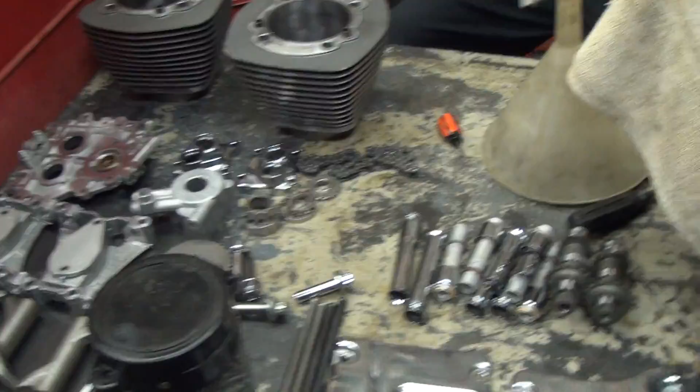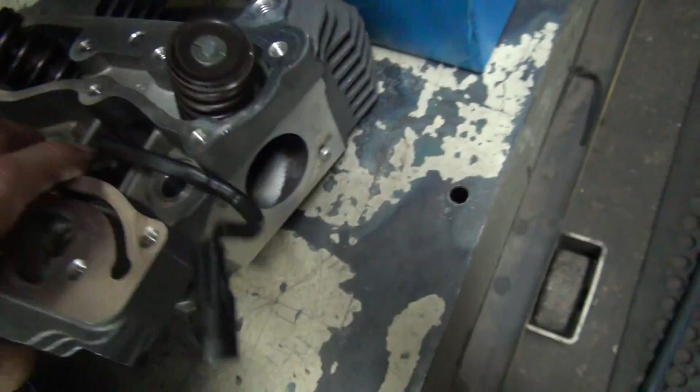Okay, there's our junk pile. New parts over in the middle pot. So these are the heads. Don't see any damage on anything. Nice and clean. Lifters we're going to replace. Cams we're going to shit can. Push rods go with the cams.

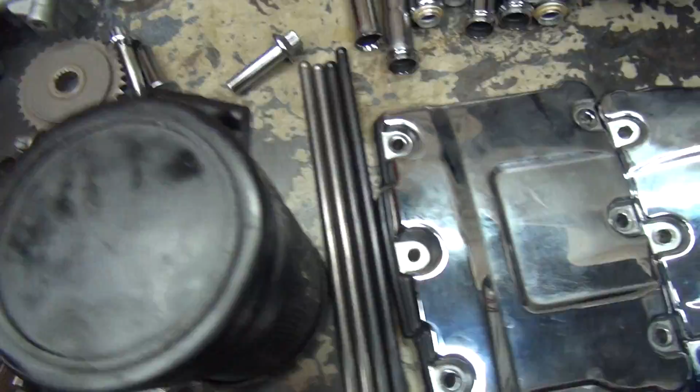The rockers have very little wear in them. There's a little mark right there, so it doesn't look like they actually ran without oil. It would have been a lot worse, huh? They would be all chewed up if they were. Is that like matching marks like this? This is actually inside the rocker box right here. The wearing part's over here, but there's no mark. Okay. That little mark right there that you can barely see, yeah, that's from the rocker arm.

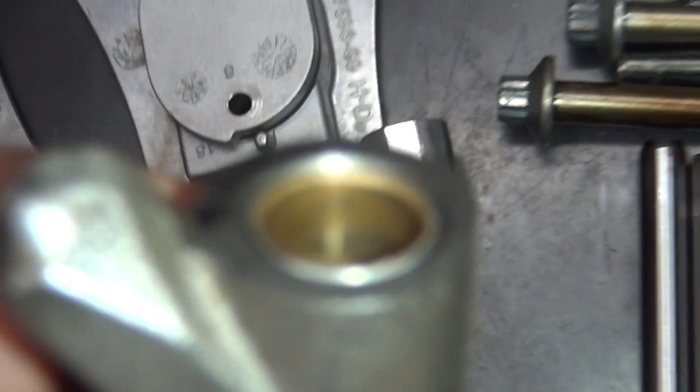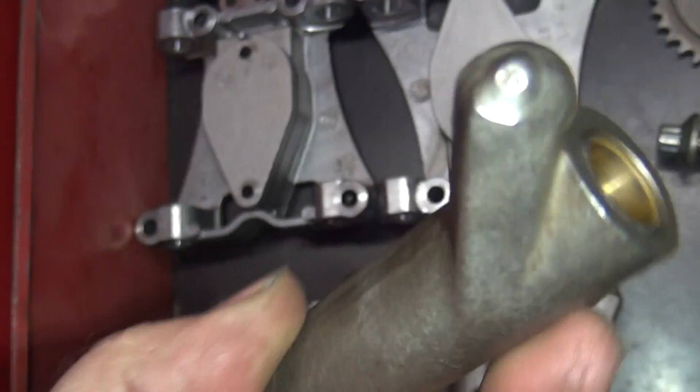Okay. So these are virtually brand new. They're not even broken in yet. You can see it's only got just a little wear mark right there, and that's it. So there's a little bit heavier marking there, but still that's not abnormal. That's just breaking it in still. This is what, 5,000 miles you said? Mm-hmm. So there's no evidence that it ran totally dry of oil. There was still oil in there, even though there was no pressure. There was oil in it.

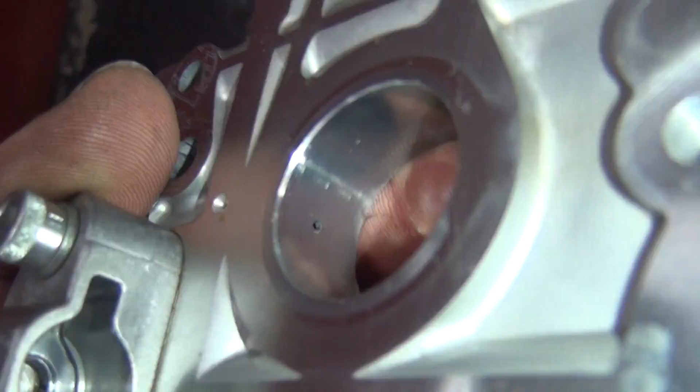The cam plate, the same thing. The cams run right on the cam plate. It's still nice and mirror polished in there. The bushing in here barely got wear on it. You got the cam hole over here, nice and smooth. So even the oil pump doesn't have too much wear in there, just that normal mark they always have right there, which is barely any. There's nothing all the way around.

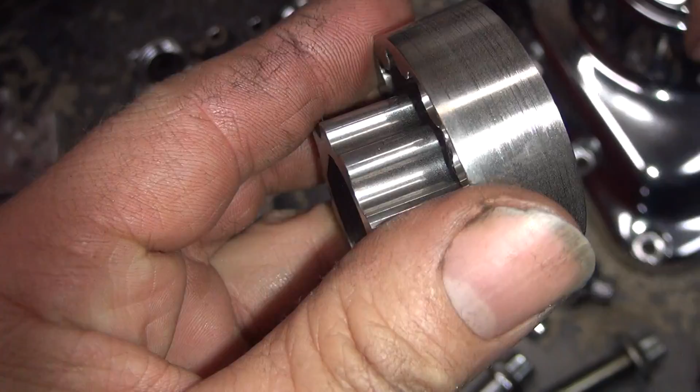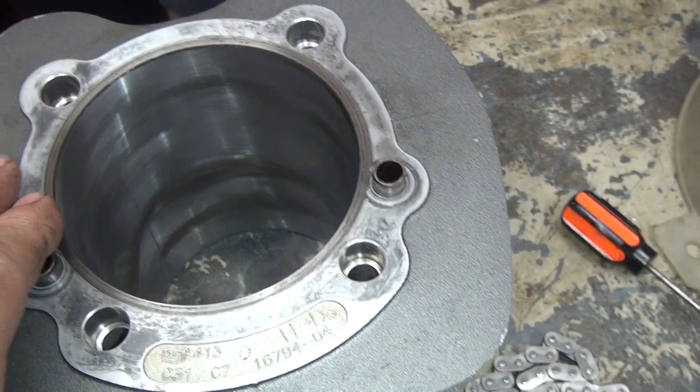So the rotor gear in here, it's all good. Got some marks on the outside because the crank's flopping around like it always does, but the crank even appears to be halfway true. So this stuff has no wear to it. That's good. So cylinders look pretty good after we hone them. Yeah. So you can see the new crosshatch I put in there, a lot flatter of an angle.

The dark areas there is where it did not clean. When you hone something, it only hones the high spots. It does not do anything about lows. So it doesn't hide anything. That's why I don't use a ball brush, because a ball brush will follow the low spot and make the cylinder out of round. A hone will try to make the cylinder round.

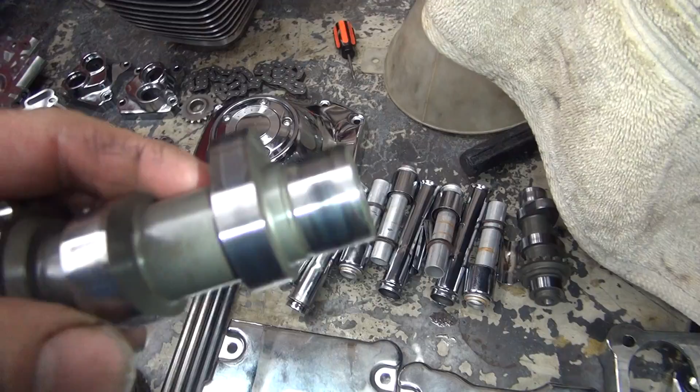See all the different chatter marks and uneven marks? That's why that was chattering so bad when I was honing it. You see how this one here is more even long marks? That's why it was out of round, but it wasn't chattering real bad. It was actually rounder. So they all look pretty good. The cams, I didn't like the marks on them, but I don't like the stock cams because the materials suck anyway. Plus the grinds on these aren't too good either.

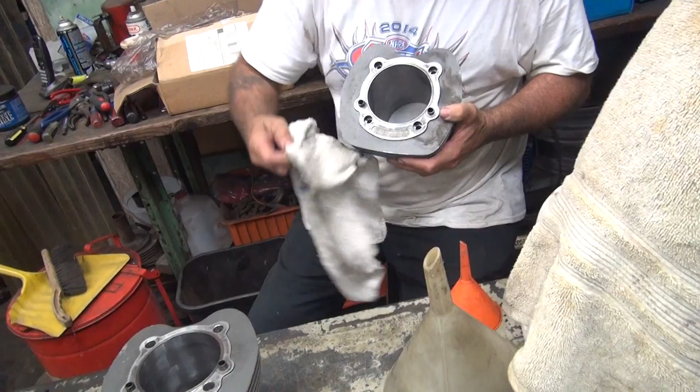What's this? Rust marks in there or what? It is rust marks in there. I don't know why it's in there. It sat for a long time at some point. That is rust marks too. But luckily it's in the middle of the cylinder where the piston's almost not moving and almost no load down there. So even though it's not the best, it's not super bad. But that just tells you the motor sat a long time wherever it was at before you got it. Nobody ever rode it. Yeah, it looks that way.

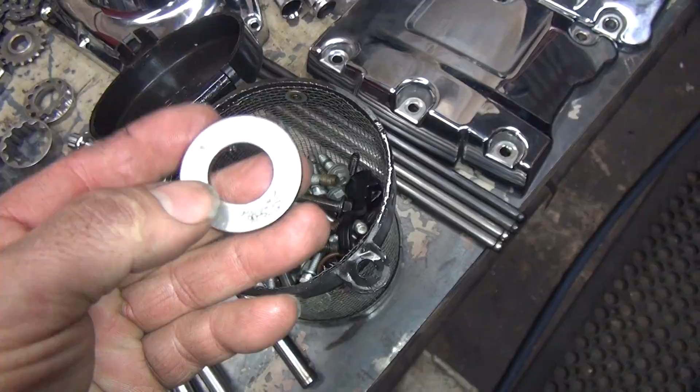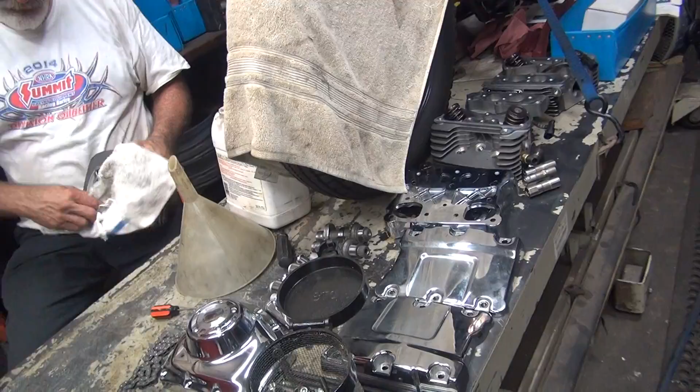All right, so that's what we got there. All the hardware and stuff's in here, all cleaned up. Same thing, all the little washers and stuff have no wear to them. There's no evidence of no oil. So Harley was lying. Well, you're the one riding the bike. You know what it did. Well, I knew it slowed down twice, and then I shut it off after that. It got hot and it started not going. So Harley said they did a bleed down test on it. Well, anyway, here's the new selection of parts over here to choose from.

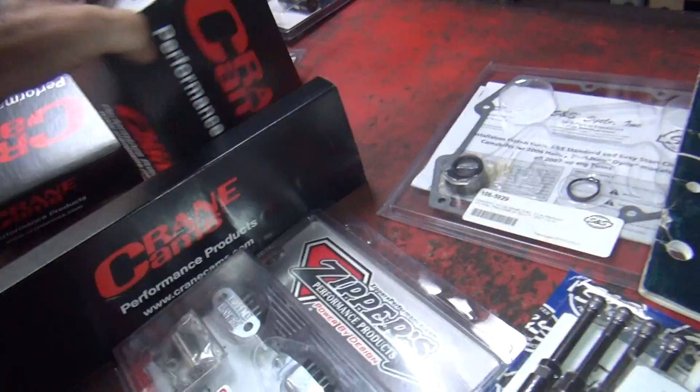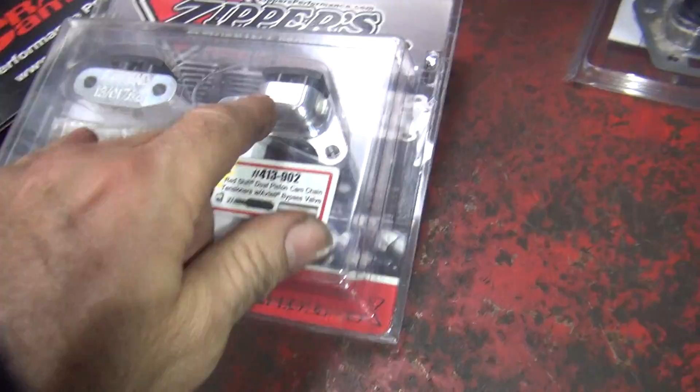This is your S&S fully adjustable push rod and the new lifter, the new push rod cover kit, so you can adjust it. This here is the Evo ones that you use also, same thing. And you just use a panhead or a Sportster clip here. Evo, or Ironhead Sportster, not Evo. These are the Crane push rods here in a kit form. Different than that? These are push rods over here in non-kit form.

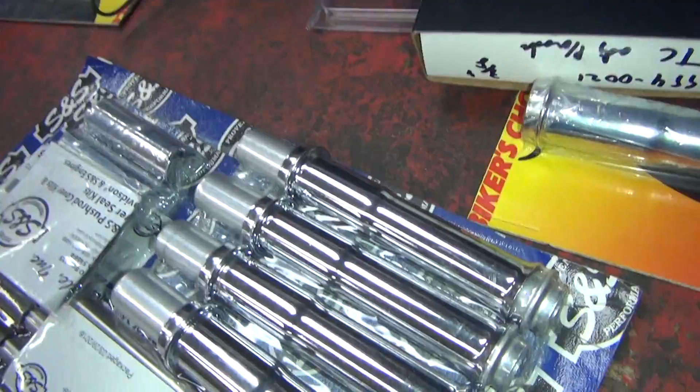Are they adjustable ones too? These are my kit form because I got them by a box of 100 at a time. Oh. Same thing as what's in the bag? The difference on these is... No, not beefed up like that or what? This one here you cannot fully adjust up inside here, so you have to take the motor apart to put it in. Oh. We're already apart. How much savings is there?

Then the biggest thing about this one is you can actually torque the snot out of these ones here and it will be nice and tight. This one here you got to hold on this little square piece here and you can't get that much torque on it. Really? And they're a pain in the ass to adjust. These ones are a lot easier to adjust, and I like these ones a little bit better, the torque on it. And they're the same size 3/8 push rods anyway.

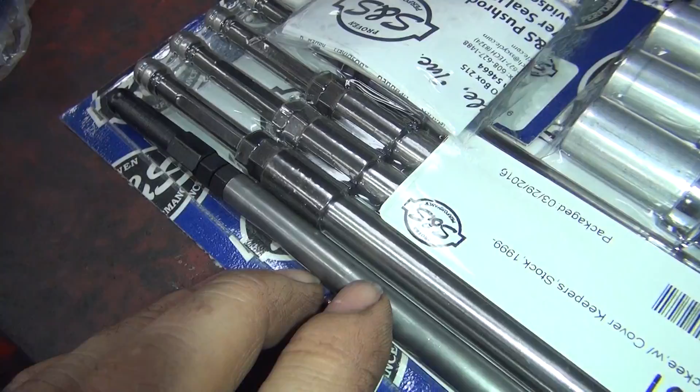The adjuster screws might be slightly bigger in size on this one than this one for more load. But for your application, these are fine. Even for hot rod use, these are still fine. Okay. But the thing is, the adjuster will stay tight easier and not have a problem unscrewing. Okay. So I like these ones better. I prefer this older style better. Let's go with that then.

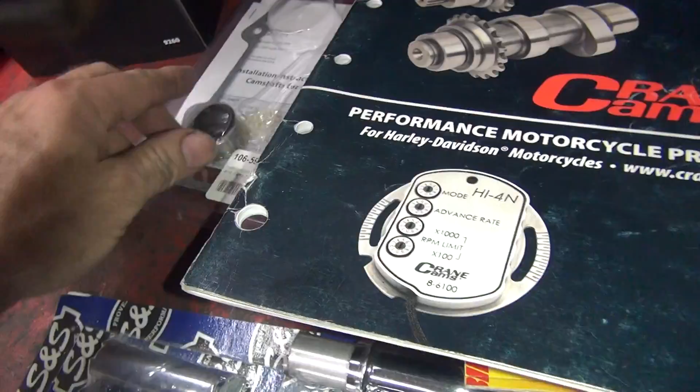Let's see. This is your bearing kit here, if you want to put new bearings in it. New snap ring and a new gasket from S&S. I'll have to go with that. I have the bearings separate also, and if you already got a gasket set, your snap ring is probably fine. So I got you covered either way. Right. So that takes care of that.

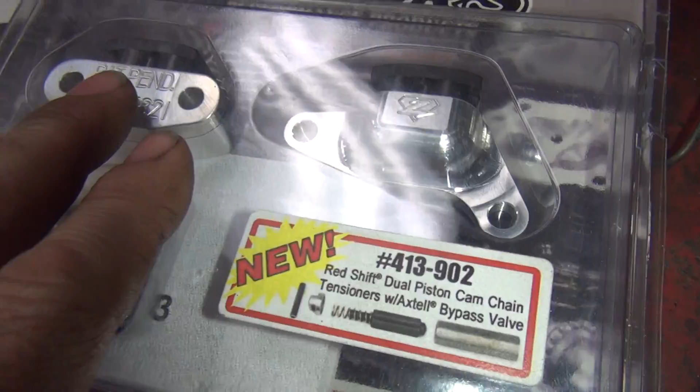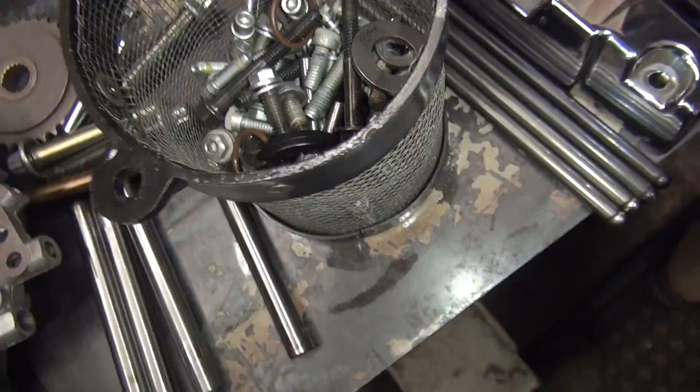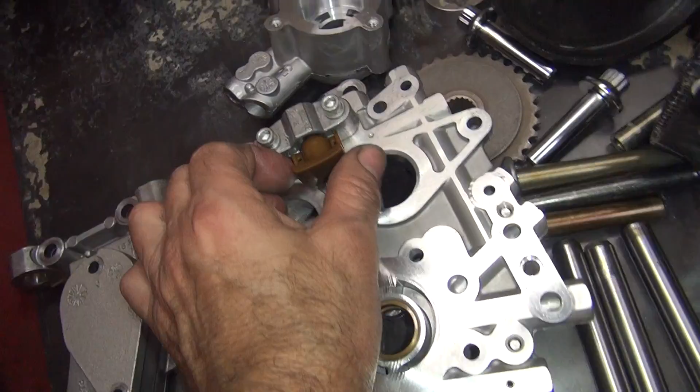Actually, this is our dual tensioner over here, which allows the tension to work more even against the chain. Okay. Versus the single tensioners over here, which just push out on a single barrel right here, and it can rock back and forth. Somewhere in this mountain, I think there's a tensioner. There it is. So when you're on just that one cylinder right there, this thing can flop around back and forth a little bit in here, and all you got to hold it is this plastic right here.

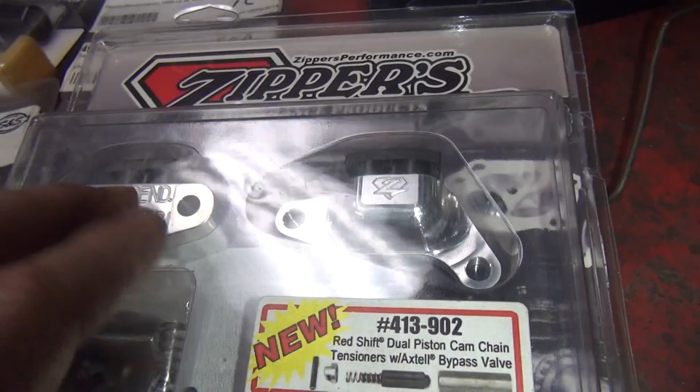And there's one on the other one? Whereas these ones here, they have a dual plastic button that goes up and down as a dual. You get rid of this thing now, huh? Yes, so this is a high performance upgrade, which I like because it makes it push more evenly on the pack. We'll take that.

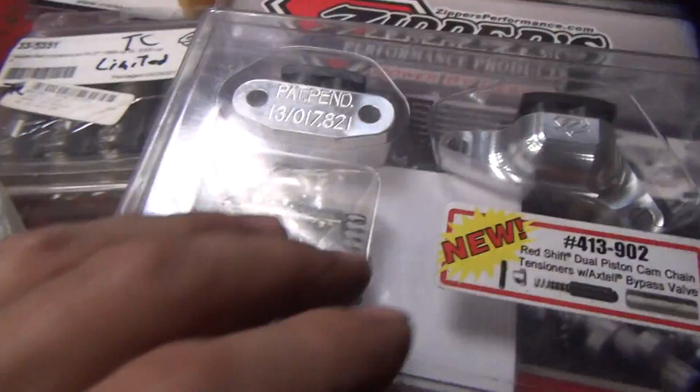Where's the second one going to go on the other chain? There's two of these? There's one inside, one on this side. Okay. There's another one in there somewhere else. I see it. There's one on this side, and one over here. So, okay. That's the outer one. So that's how that works. So yes on that. Now these here are the Crane lifters that are in the retail package marked Crane. So these are actually made by Crane.

The other ones I got come in boxes of 140 per box, and they are the silver ones that look more like these S&S ones over here, but they don't have Crane written on them. Okay. And they're in bulk form because they're in big boxes. So they're cheaper than these ones, because I paid more for these than I did the ones in bulk. Okay. Or we can buy the S&S.

If you want to buy the S&S ones, we have them in two forms. We have them in limited and non-limited. What does that mean? Limited is for when you've got really big springs in there and big cams. They only have 50 thou of travel in the lifter. And you adjust it all the way to the bottom and come up just a little bit, so it's almost bottomed out all the time. So it's almost like a solid.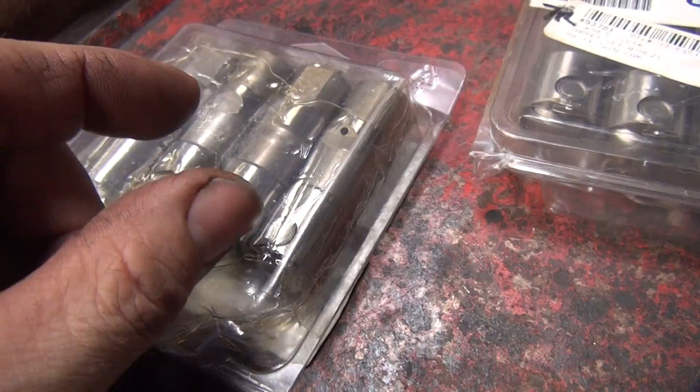Is that similar to what I had in it? On what? This one? I don't know what you have in there because I don't know what Harley cams are. Because I don't work on Harley. I don't use Harley crap, so I don't know what they use. These are Crane cams. So we got 601s, 5, and oh, these are both 5s. 5 is a hot rod cam. Okay. Those are the only 3 grinds I got for 06 and later bikes.

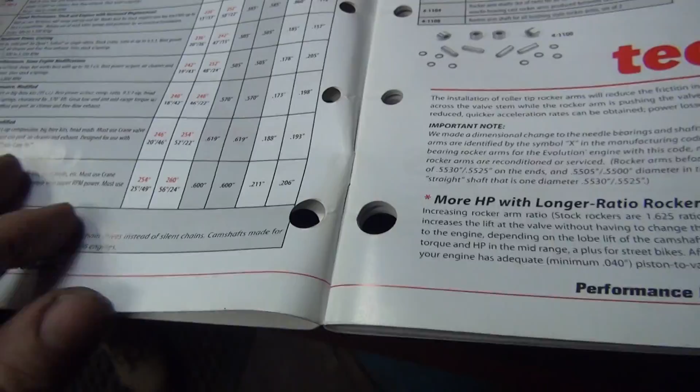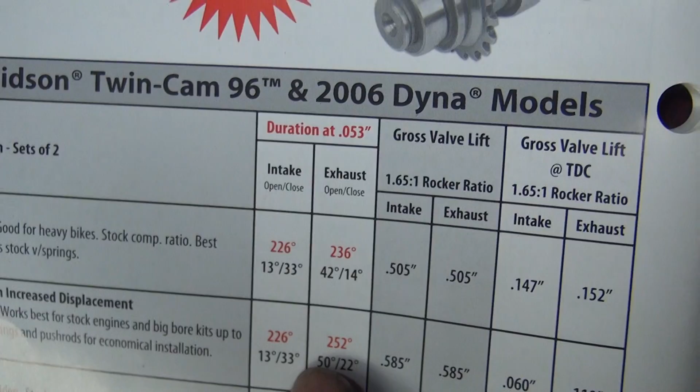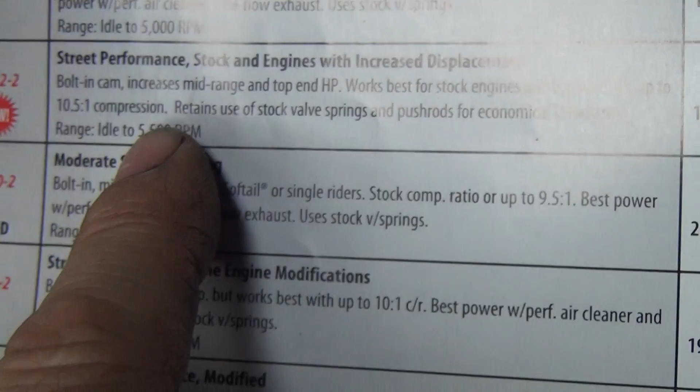So if you go in your comic book over here, and you look for your 7 and up, you have this new one right here, which is brand new for whatever year this book is. Street Performance stock. So this is 226 by 252. Damn, this reflection's bad. There you go, 252, and it's 585 lift, and you got 60 TDC and 118 TDC, which is pretty damn mild. And if you read right here, it's for fairly mild applications.

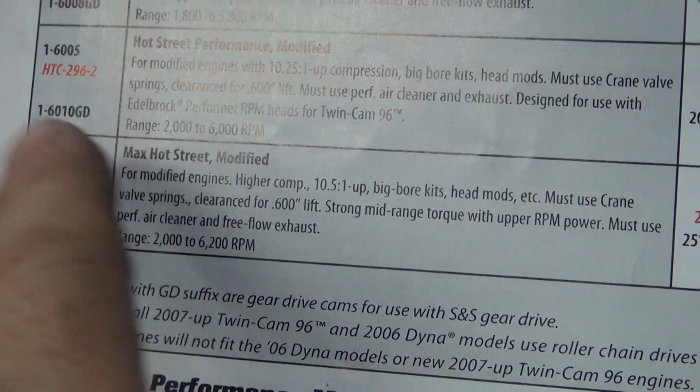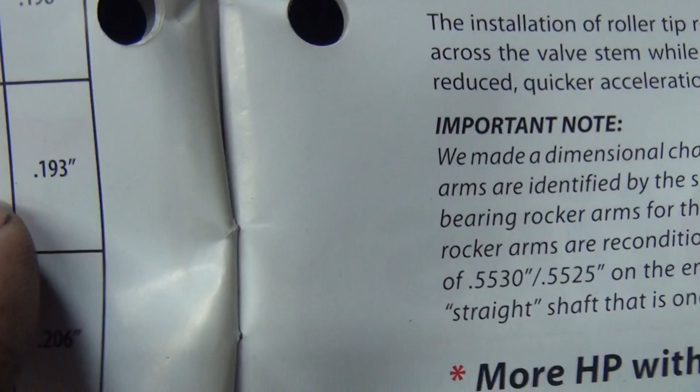Up to 5,500 RPM. Now with a hot rod motor like yours with a 110, you want something a bit heavier. 605. Now 5 is this hot rod one here. Is that light on? No. It's bad reflection. There we go, we can read a little better now. Okay, so we got the 5, which is this one right here. This is a Hot Street modified. This is 246 by 254, which isn't all that big of a cam really, but it's 620 lift, 619. It's 188 by 193 on the overlap on your TDC lift, so it's pretty heavy TDC lift too.

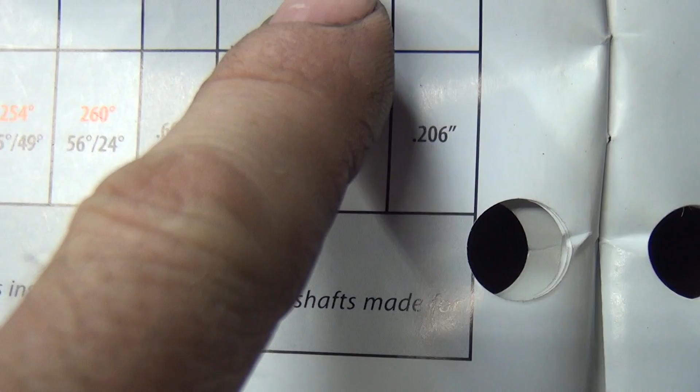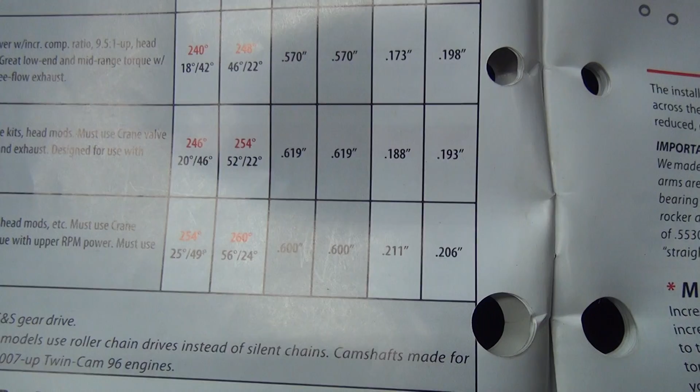So this is a relatively short duration, but really high lift and high valve acceleration. So it's going to be a good strong pulling mid-range motor, and it's going to run out fairly quickly. And they're saying 6,000 RPM, and yeah, it'll be dead up there. 10.25 compression. I only got like 9.5, don't I? Whatever. Don't matter. Okay. 605. Want to roll with that or what?

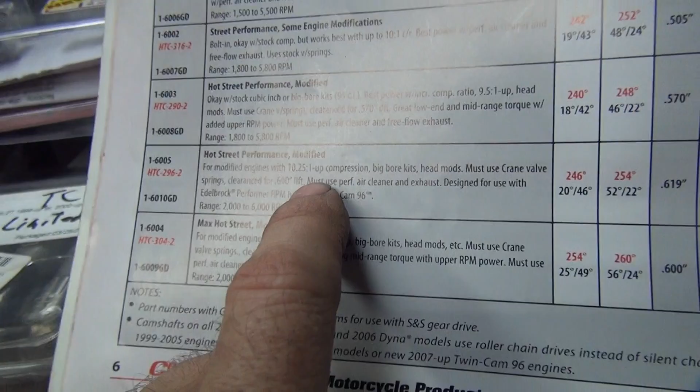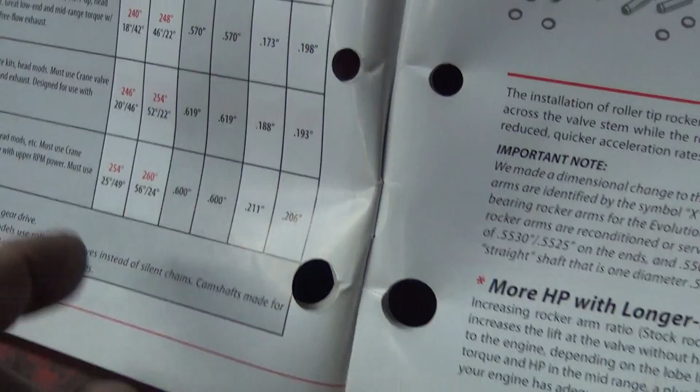High compression at lower RPM. All that does is give you the more low end torque that you lost by having a bigger cam, but 246 is not a big cam. You know, compared to 226, it's a big cam, but compared to 254, it ain't big. Let's roll with that. 605 then. My bikes, I don't have anything under 280s. Oh, I imagine yours though. This is my road bike though. Well, and so are mine. I just ride differently.

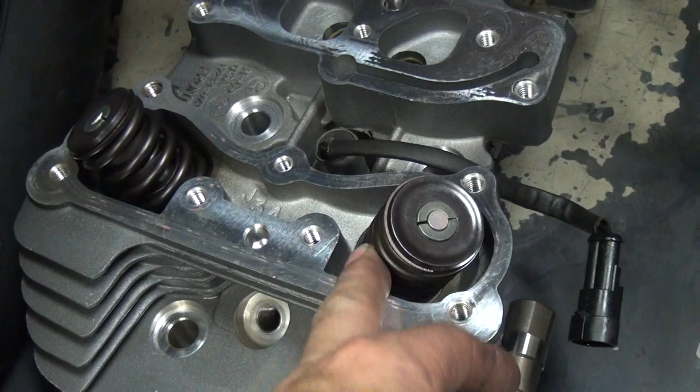Now, the only thing is the high lift. Now you have the 110 heads, so that high lift might bolt in. We already have heavy duty springs in here. But we do have to take these apart and check the lift to make sure we have room for 620 lift. Okay. I don't think it'll be a problem, but we have to check it. How do you test that? I have to take them apart and look at them.

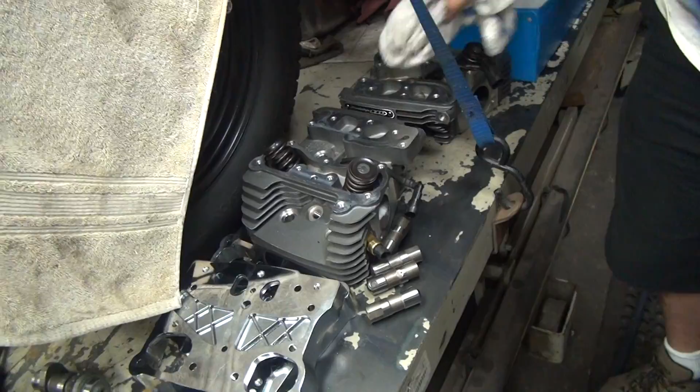We can also check the valve spring tension to make sure they are big springs. If not, I have bigger springs also. Okay. So, anyway, that's where we're at. We'll make some decisions on what we're going to do, and then we'll start putting it back together, I guess. Okay.